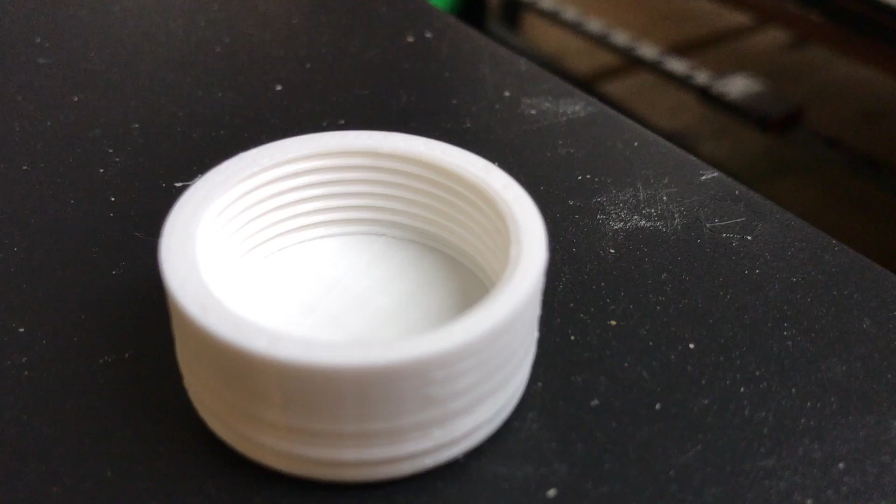To find a good way to edit it.

This was a feature that would have been more helpful for my last design software, 123D Design, but that didn't have it, so I found out Fusion 360 had it, and I want to test this out. This will mostly be a screen recording video tutorial type.

So anyways, let's open up Fusion 360. Here we are in Fusion 360. We've got a blank canvas design to start with.

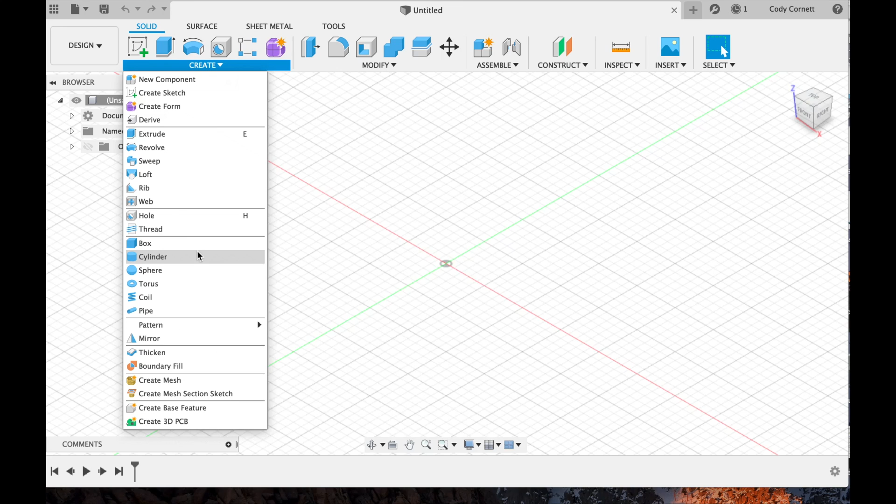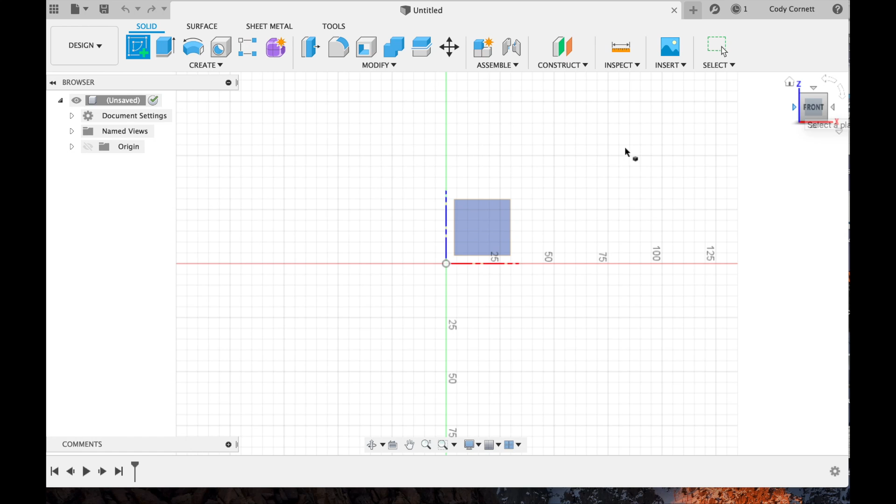So we're going to click create shape and do a simple cylinder or circle to start with. Then we'll add another circle in between it to extrude the part out, and we'll add a thread to it.

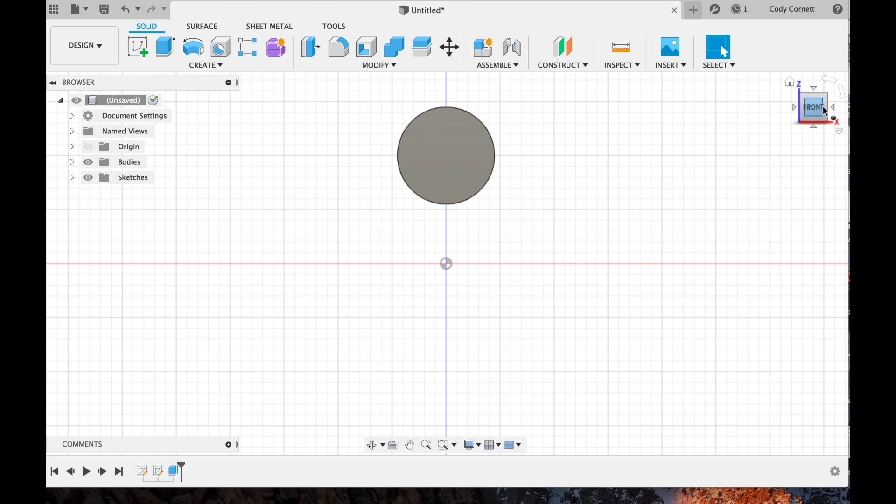So this design is going to be similar to a soda bottle cap shape. Now we have the first circle finished. We'll hit finish sketch, so we can give this one some dimensions, and then we'll add the second circle to the bottom of the solid piece.

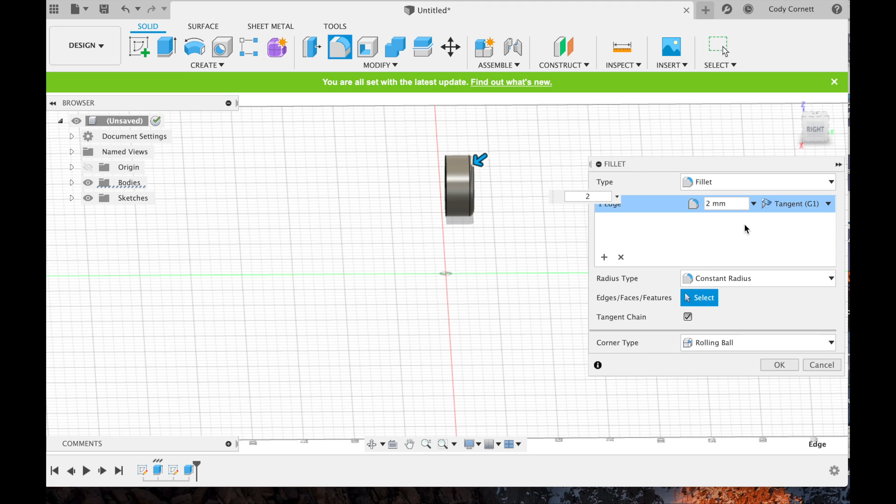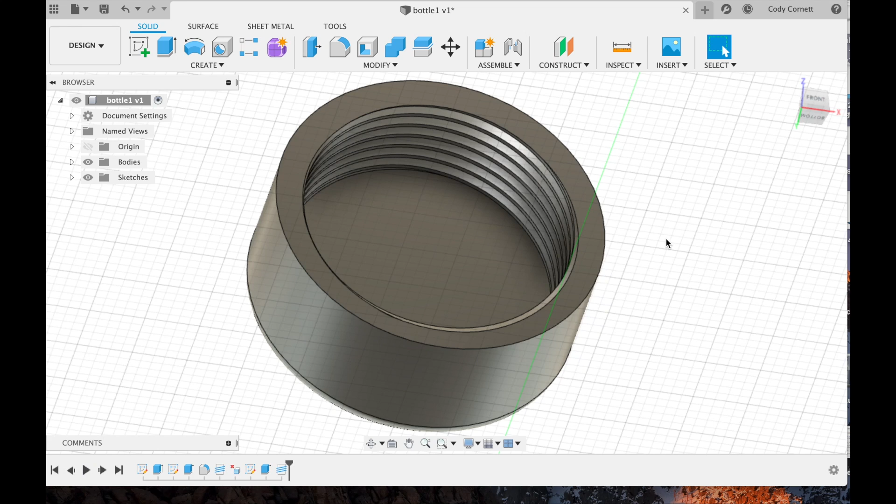Now we can add the thread to this piece. On my first attempt, I did not click modeled, but this one I'm going to be able to actually print the threads on. If you don't click it, it won't print. And this is essentially it for this model.

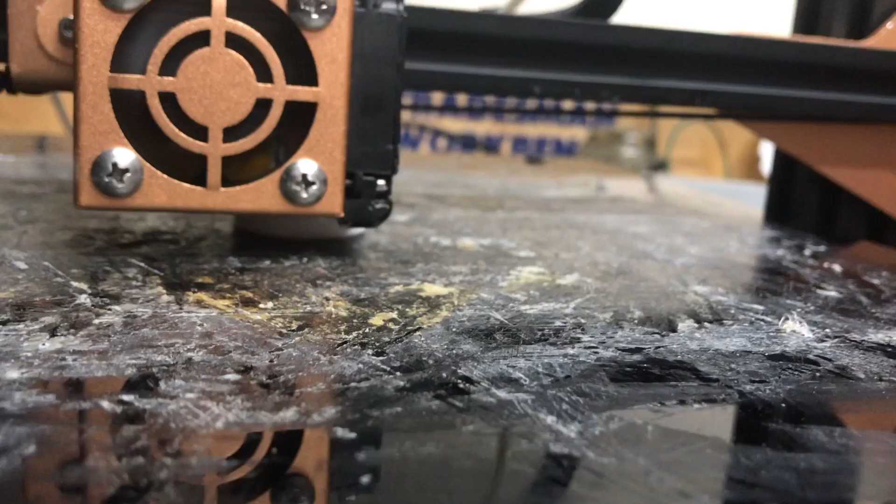Here is the finished print. I printed this twice. The first attempt I forgot to click model in Fusion 360 on the threads, and it didn't model them, so I came out with no threads. But this turned out pretty good. It's not the best quality print, but it gets the idea across of how to print threads in Fusion 360.